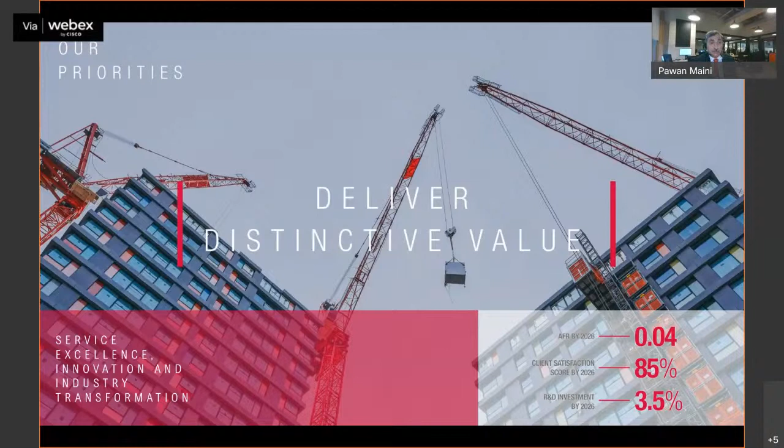And the last one is really showcasing again - the graphic over there actually has our Mace Tech Solutions, which is about how we build automated buildings. So we want to reduce our accident frequency rate. We want to develop a client satisfaction score, and then more than the profit that we make, we want to invest in R&D, because that's how we believe we will be able to provide value to the society, and in turn create value for our clients, for our staff, and ourselves.

So just a bit further about us, 4 goals for us: safety first, client focus, creating opportunity for our staff, and integrity. We operate across the value chain for built infrastructure, but it's primarily vertical infrastructure. Anything related to horizontal infrastructure, we do play a smaller part in it, but our focus, as you can see over here also, is on the built infrastructure.

Something that makes us a bit apart from others is we operate across the entire life cycle of projects. So we are a small developer in our own right. We are a project management firm, a program management firm - that's the part that I work on most. We are also a contractor, primarily in the UK, a significant contractor - you're talking about 15,000 crore rupees of construction work on our own books. And finally, we are a facility management operator.

We pretty much spread all across the globe, a little over 6,000 staff. India, we are about 5% of that, so about 300 staff. Overall revenue, again, in the range of about 18,000 to 20,000 crores on an annual basis. And that just gives you a smattering of where our projects are located. And the last one about ourselves over here, before we jump into the modern methods, gives you an idea of the clientele that we have in India.

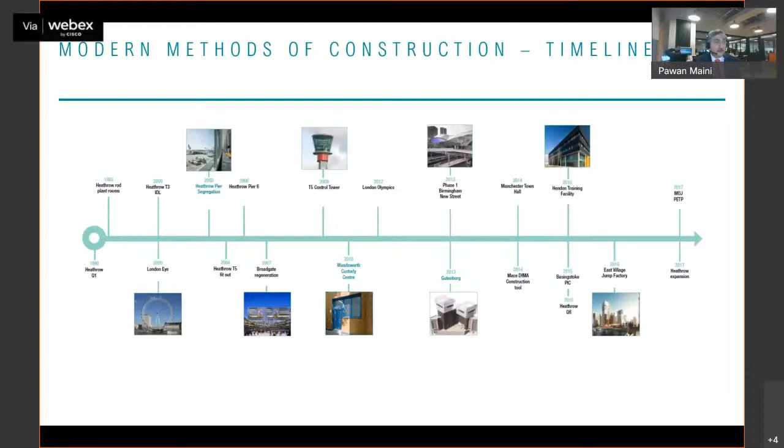What you see here is the East Village Jump Factory, taking you to 2016. You will see videos on that where there are these 28 and 30-story buildings, which we were able to construct in a very rapid manner.

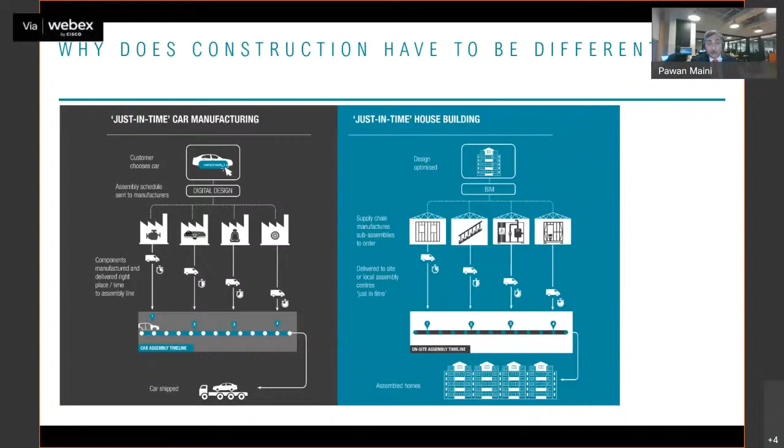So, of course, doing modern construction or modern manufacturing, there are a lot of parallels there. Now, we've got to thank people like Henry Ford for introducing just-in-time car manufacturing, right? We know how the Japanese have done the just-in-time, the Kanban systems they introduced, where each element is made and the whole car or any other vehicle is constructed. Why is it that we cannot do that in construction? It was mentioned right in the beginning that we still typically go by the age-old systems we have been using — nothing wrong against them, but can they be made more efficient? Can they be made more sustainable? That's what we need to look at, and that's what our approach has been.

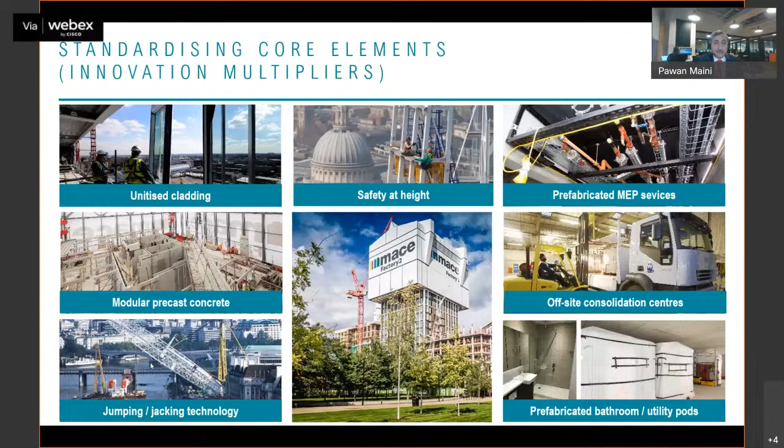We actually became the de facto contractor, pulled in a lot of stakeholders, constructed the full London Eye ring on the river, pieced it together on the Thames, and then just jacked it into place in two movements. And prefabricated bathroom utility pods, that's fairly common.

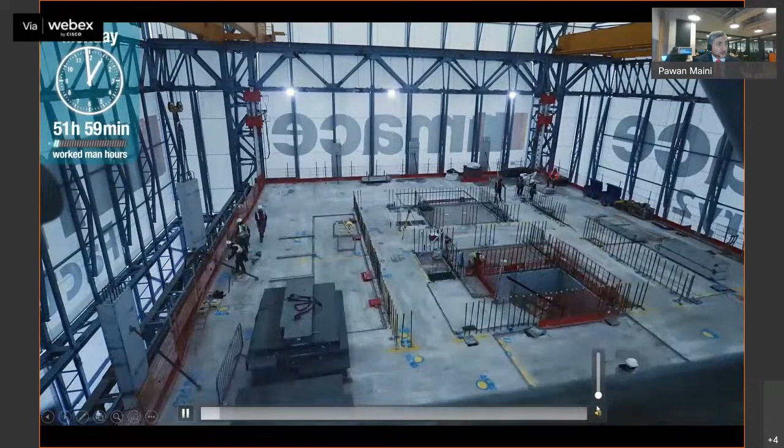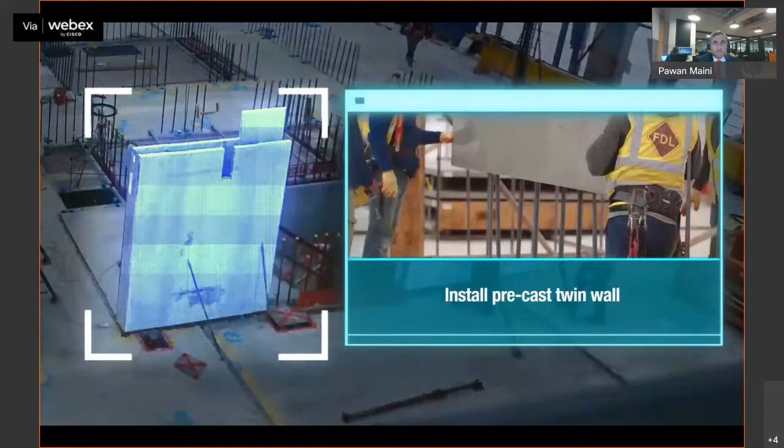But basically what you're seeing, let me just stop it for a second and take it a bit back. But basically what you're going to see is one floor being completed on this building.

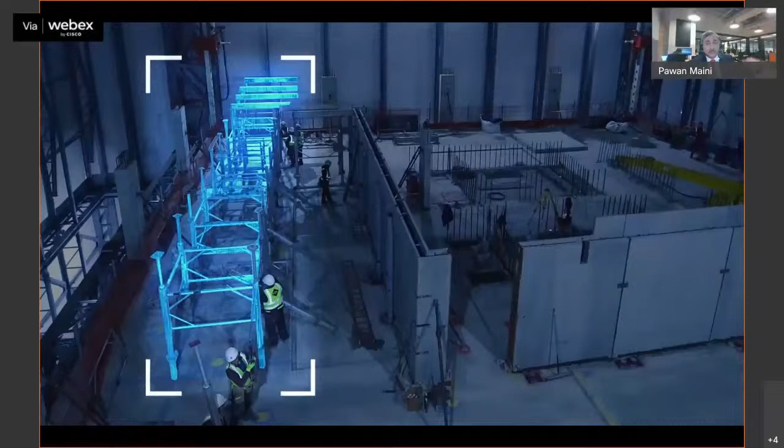This is a 28-story tower. There were two towers, a 28 and a 30-story tower, about 7,000 square feet floor plate. So nothing incredibly huge. The way we constructed it, and we'll get to that at the end, was trying to complete each floor in one week. So that's what you will see.

And that's what you see, the building on the right over there. So let me just turn this video on now.

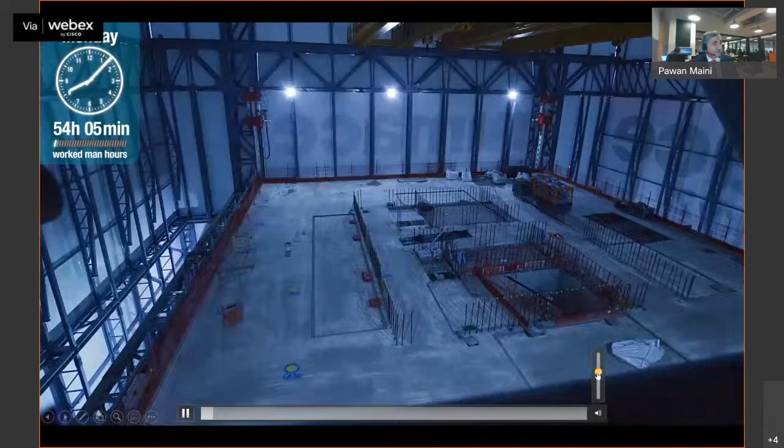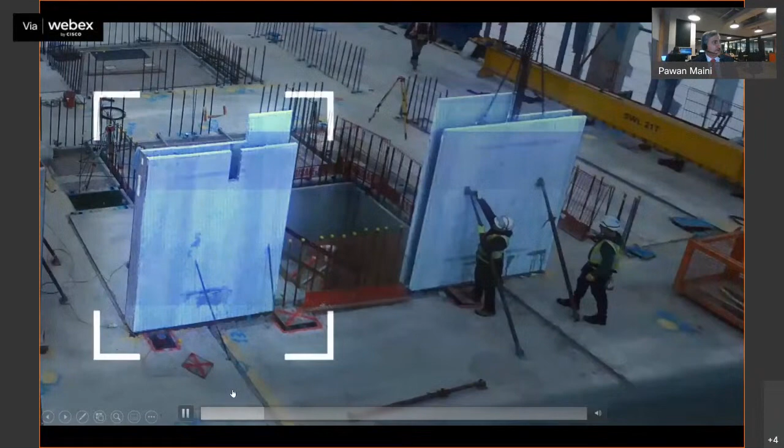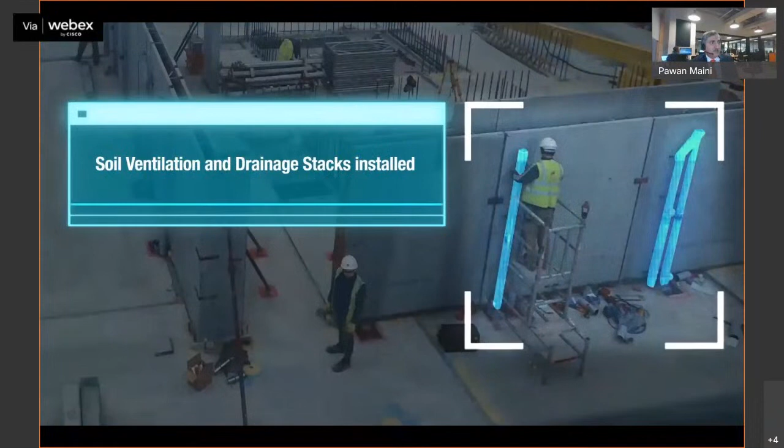So what you see over there is the precast elements being brought in, these double walled units being installed. You've got the propping for the next floor being installed. Your MEP plumbing stacks being put in, your pods being put in for the bathroom, cupboards.

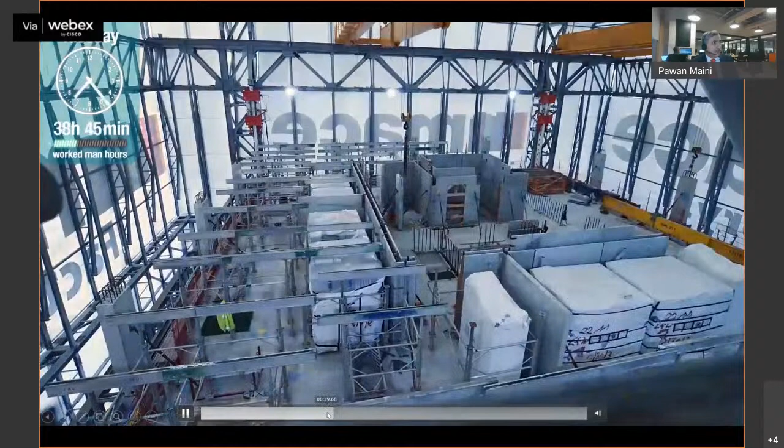One of the things you will notice over here is this is actually all being done by gantry cranes. We did not have any tower cranes on this. And what we did really was create a factory-like environment by having a 6-floor truss, which would jump up floor by floor. And by providing this covering, we were able to maintain and protect ourselves against the weather, which particularly in London can get pretty bad, cold, windy, snowing, all of those elements, providing a kind of factory-like environment within the building construction area.

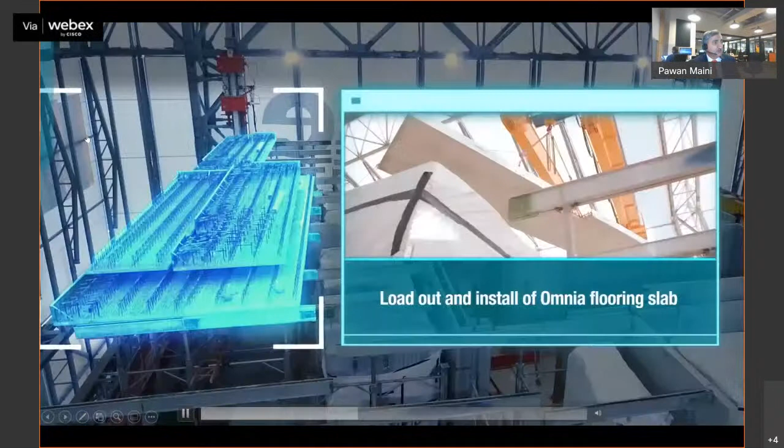So you've got all the beam elements coming in. You can see that's the amount of time that's been worked over there. Installing slabs, Omnia slabs, it's half concrete already and the lattice work is sticking out. Putting in precast stairs and half landings.

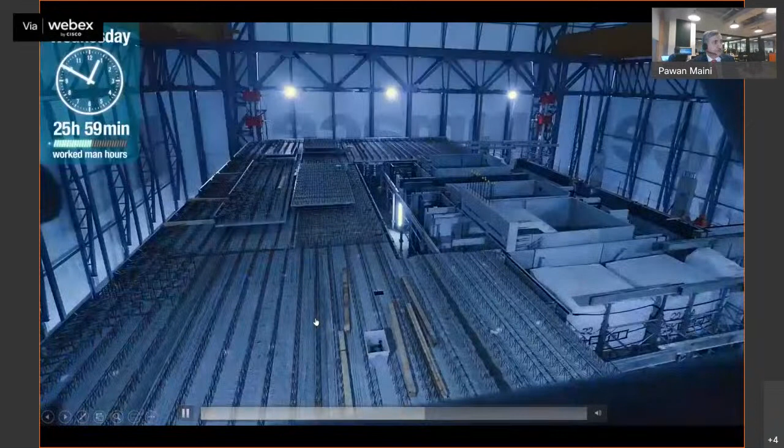In this particular case, putting in the horizontal MEP modules, getting all the rebar in for the flooring to stitch that up.

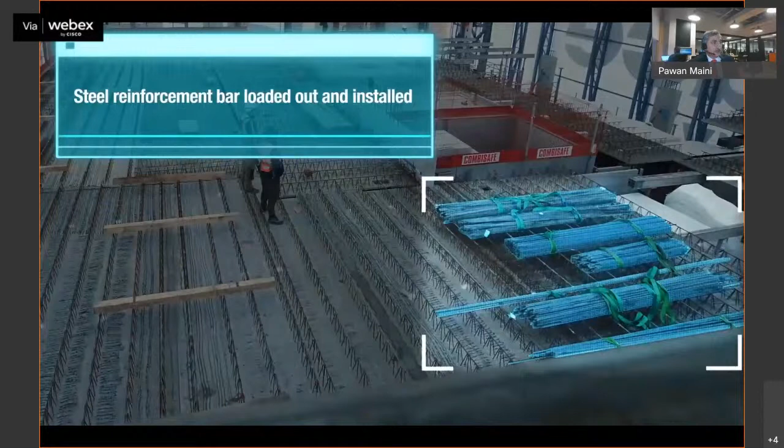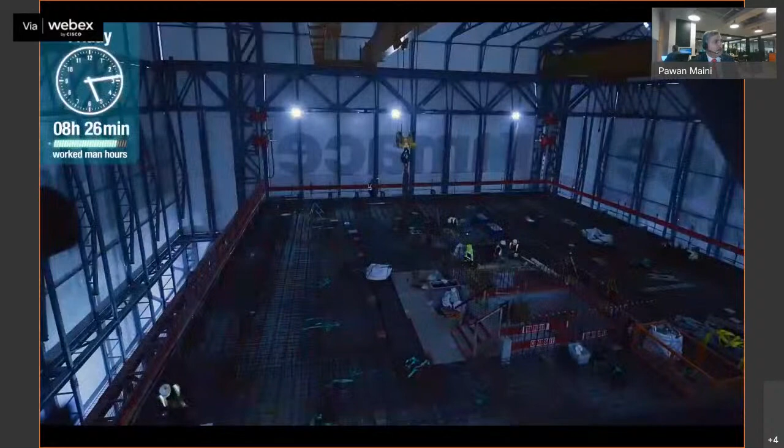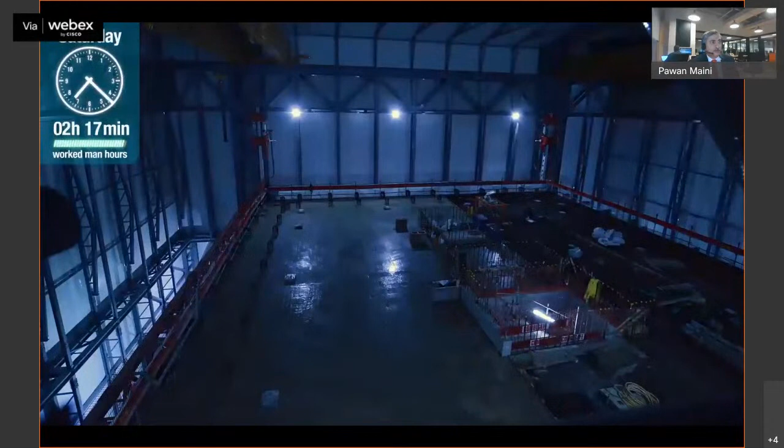Once the whole thing is completed, we jack it up. So we started from 55 hours, we're down to about 40 hours worth of work being done on the floor. And so getting all the rebar, we're ready for the reinforcement now, pour. About 4 hours of pour, and the floor is done.

So what were we able to achieve with this? Well, firstly, it was our safest delivery. We were able to make sure we were operating in a very planned, organized manner, with 2.2 million hours of safe work.

We were able to get 2 times the cycle time improvement. There were fewer deliveries because fully constructed elements were being brought to site, and a significant reduction in manual work.

Effectively, while it took us a bit longer to start the works, we were able to complete the full building in 44 weeks. So 28 floors in roughly about 9 months time is what we were able to achieve, from the start of excavation of that building to handing the keys over.

And really, where we saved a lot of time was typically on this kind of building, you would have the civil construction works happening, and there is a lag between that and the amount of time it takes for the MEP and all the finishing works, which we were able to do much more rapidly, one after the other.

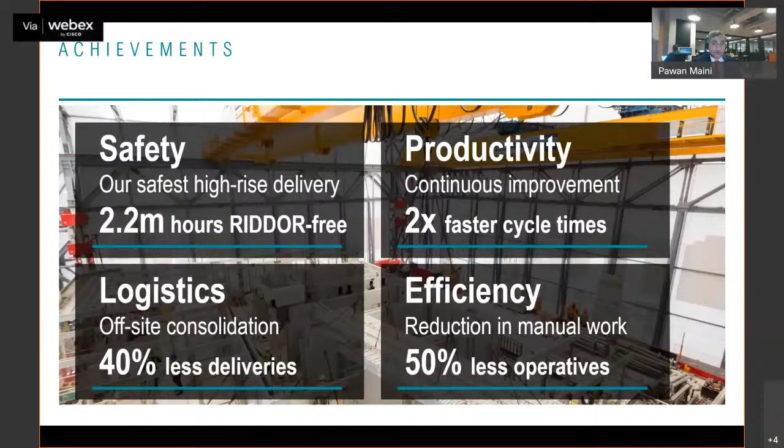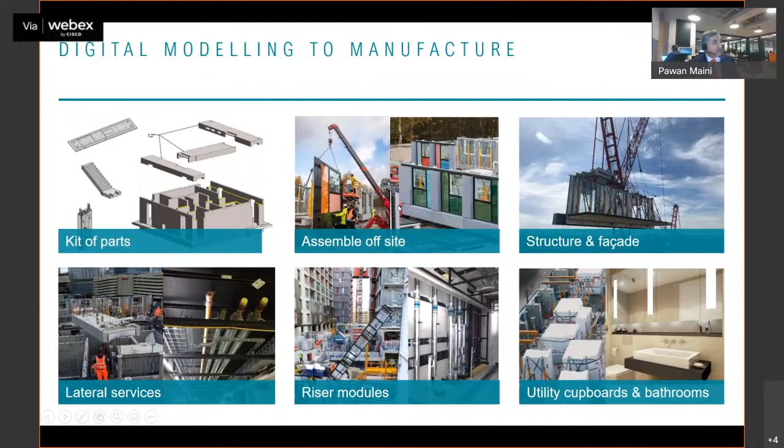This shows the different elements we've already seen. We've talked about how we would put these things together, and we've now moved on to the next level. What you see here is a constructed element with flooring already installed, and the side wall already installed. The yellow parts you see are actually the prop for the next floor. This is what we're calling our Mace Tech solutions.

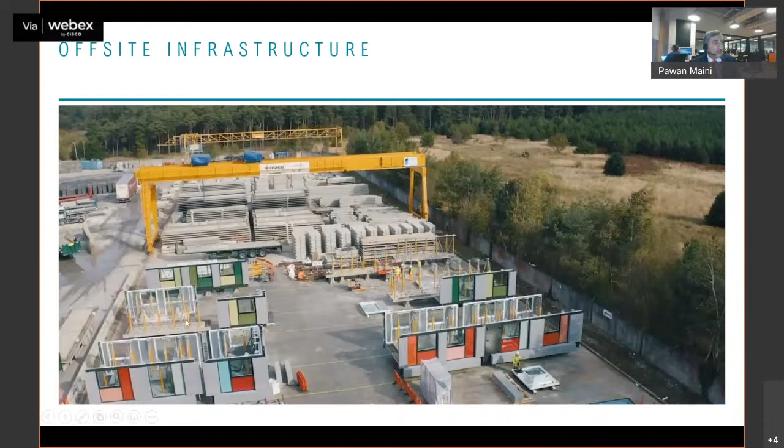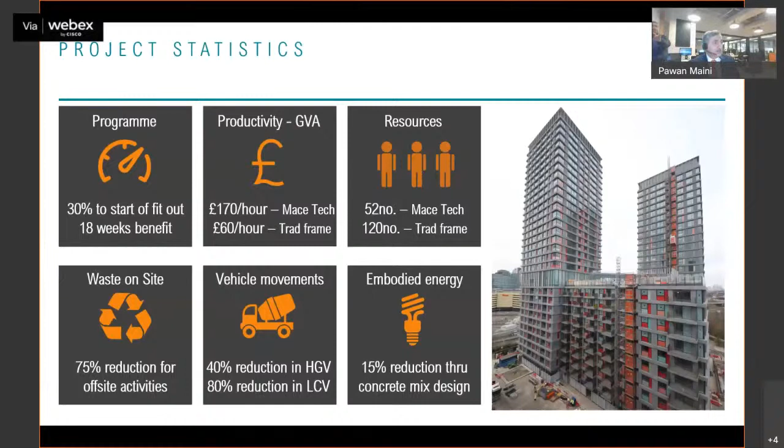This is what we've applied on a further project after that. It shows the productivity we've been able to get — almost 3 times what we have on other projects. We were able to reduce the number of vehicles coming in, reduce the embodied energy — that's the sustainable element — and reduce the waste on site. I'll show you this.

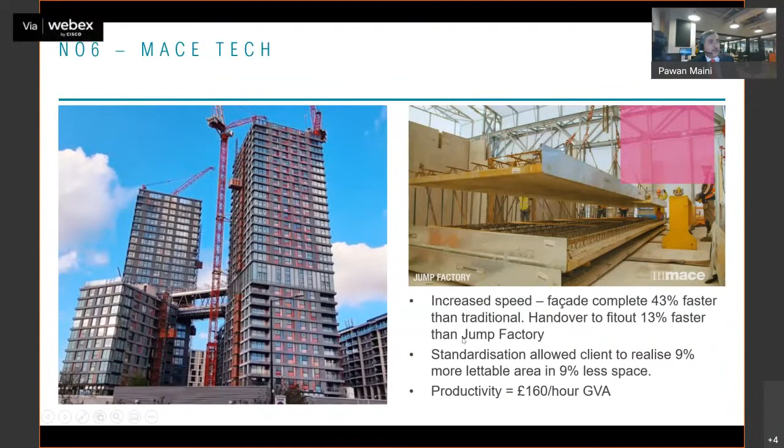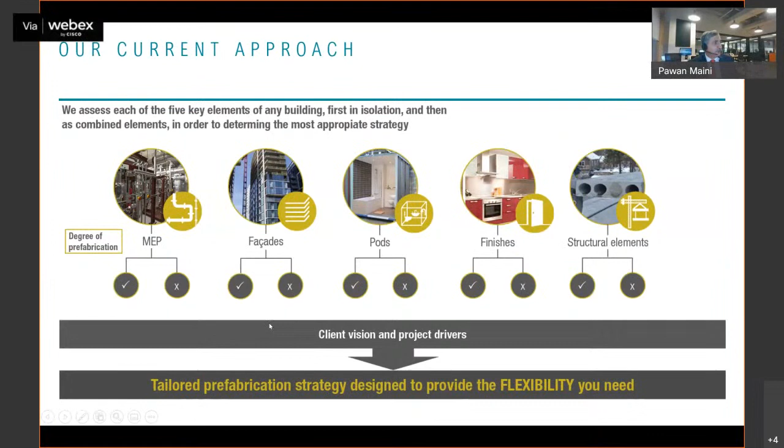That's again showing the Mace Factory approach, and that's a different element. So what we've done is present different elements, whether it's MEP, facades, pods, finishes, or structural elements. Right now about 40% of our work is being done off-site and about 60% on-site. What we want to achieve is 80-85% off-site, with much less on-site.

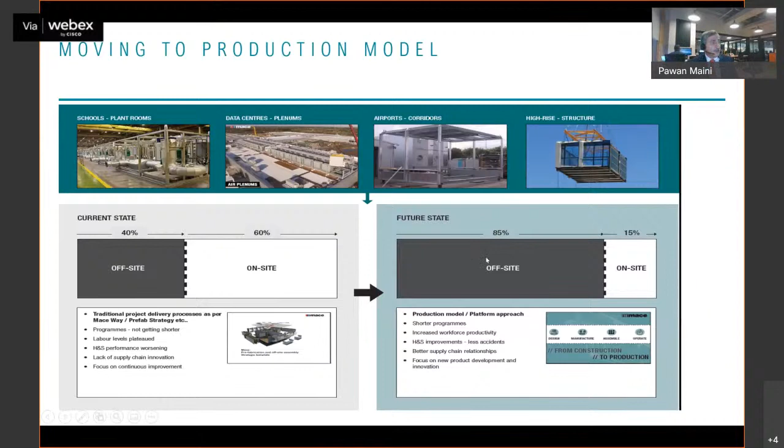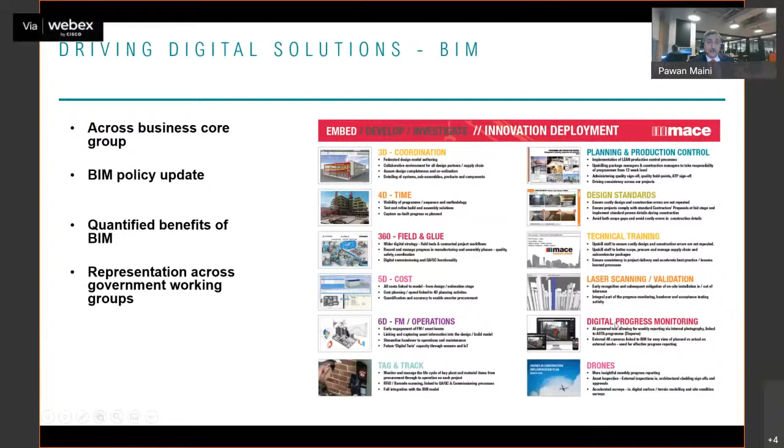How are we doing this? Everybody is familiar with BIM. How do you take that from a 3D perspective and add time, add cost, add operations? When we start working on a project, we first look at what the end use is going to be. We get the operator involved during the design stage so that when we're handing over, we already know exactly how things are going to work. These are all simple things we know — but how do you take it to the last level of detailing?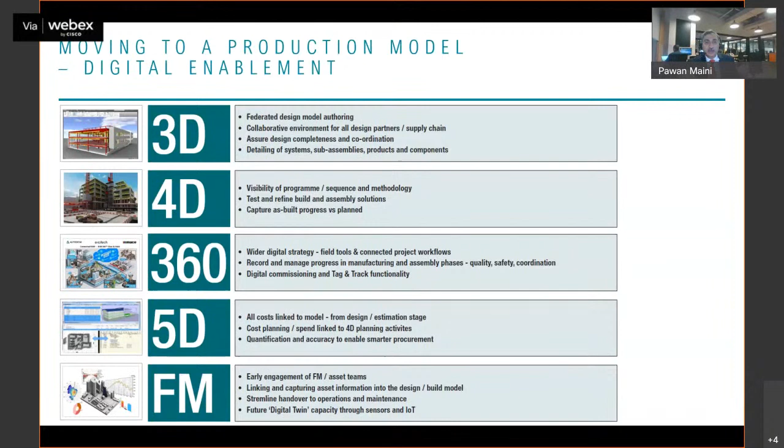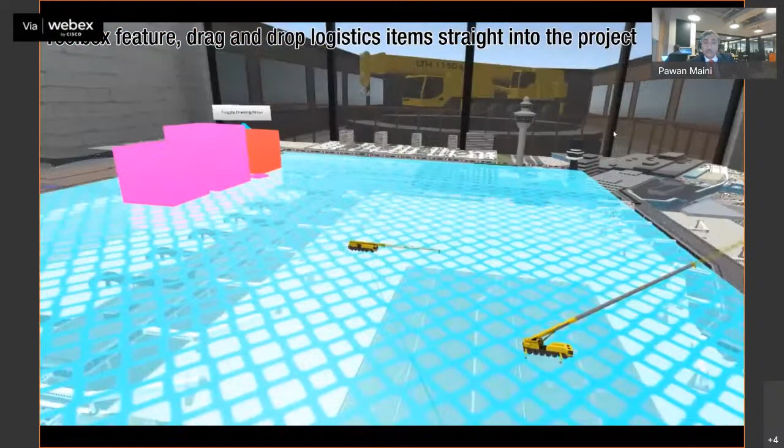These are the kind of things we do when planning a project. We use building digital twins of projects, seeing exactly what kind of equipment we'll be using, placing it on what we believe is the construction site. We know exactly what the reach is, and we test all these systems out before we actually go on site and start doing the works.

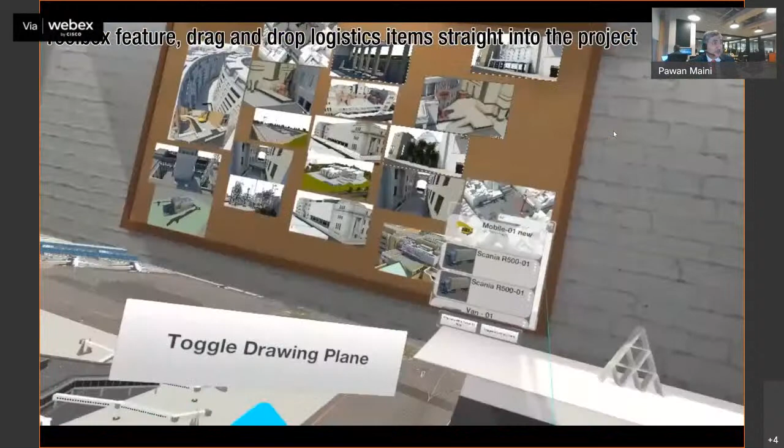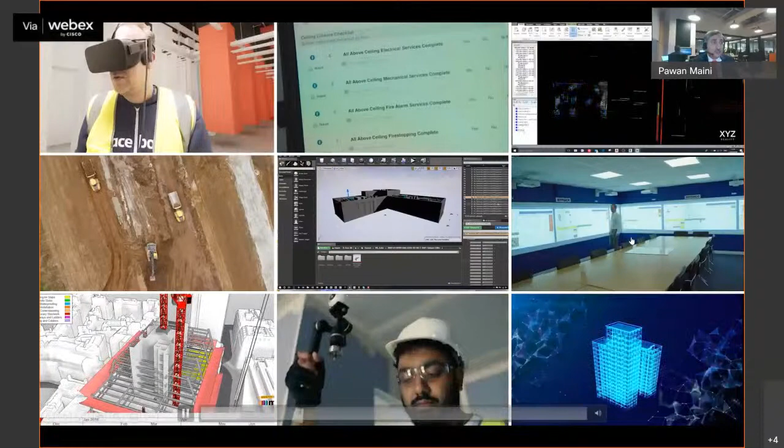Using different technologies — a lot of what you see on the right side is a digital war room. We can look at the schedule, the costs, quality reports, safety reports — all available, thankfully, just on a tablet.

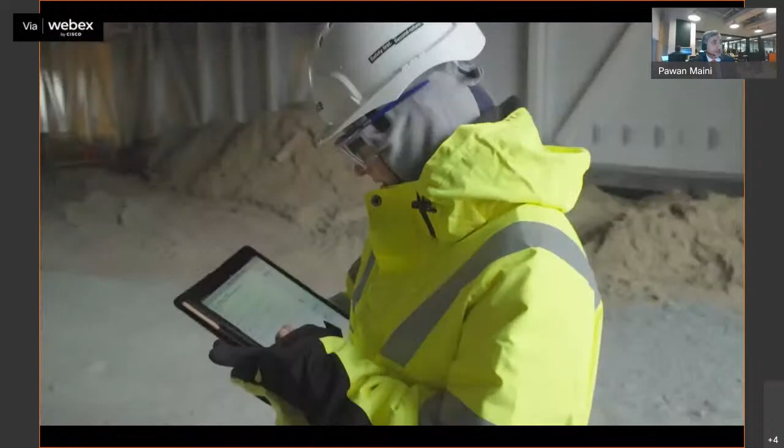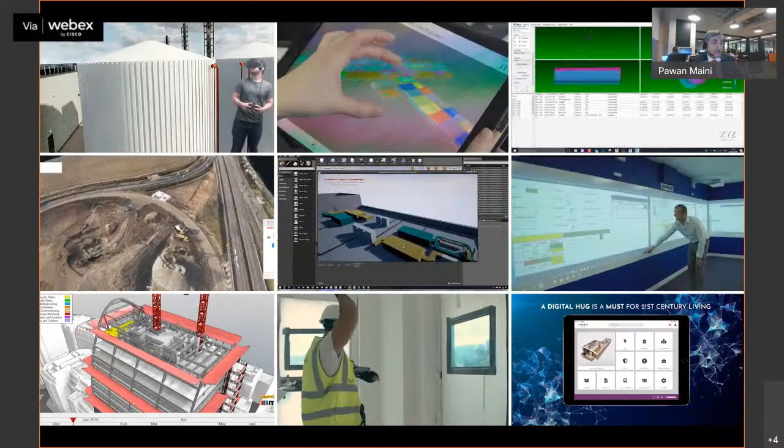What you see is a very large data center we've constructed. We're doing roughly 3,000 to 4,000 crores worth of data center construction using virtual reality — doing all these elements upfront, discussing the schedule and cost in detail, doing laser scanning, moving things around very quickly, and understanding the impact of those elements going forward.

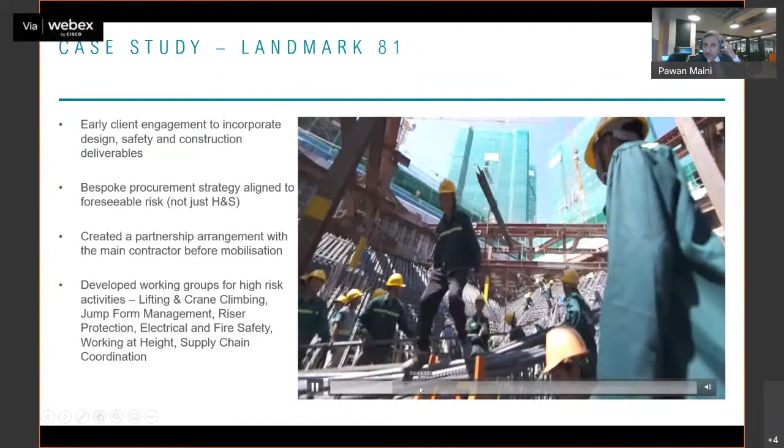I'll show only a bit of this video just to give you an idea. It's not just in India that we're doing something like this, but also in Vietnam. This is a 450-meter tall tower — 450 meters, that's a tall one.

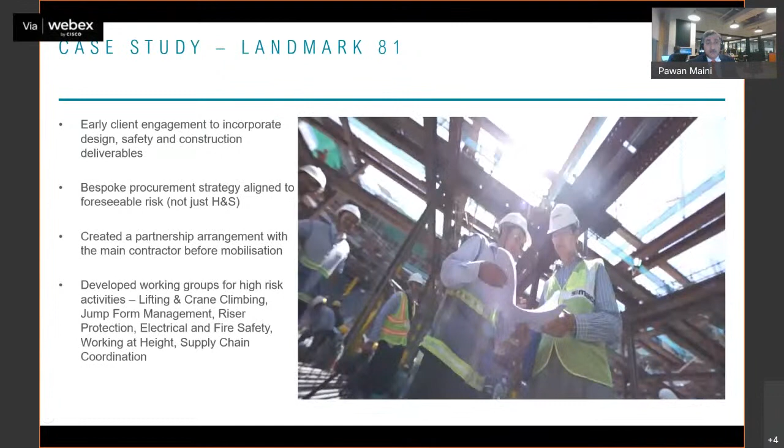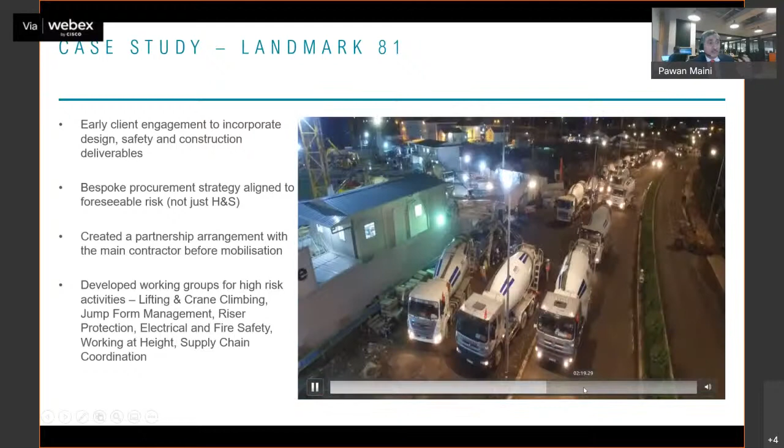Right, and we have been the project managers. We were involved on this project right from the start, looking at how this can be constructed in a safe manner. So that's what we did on that particular project.

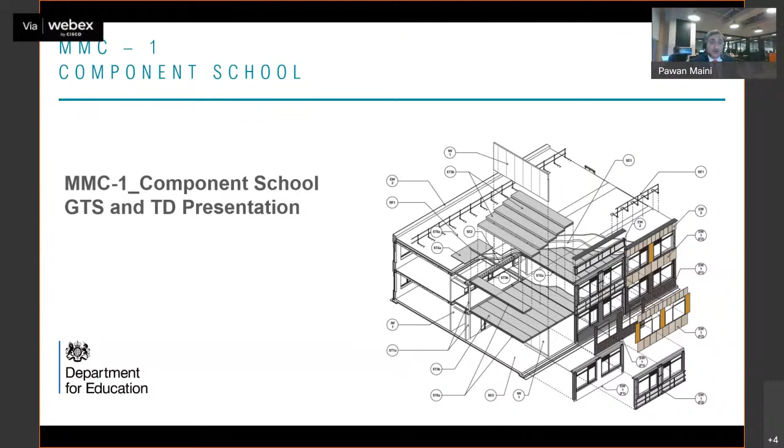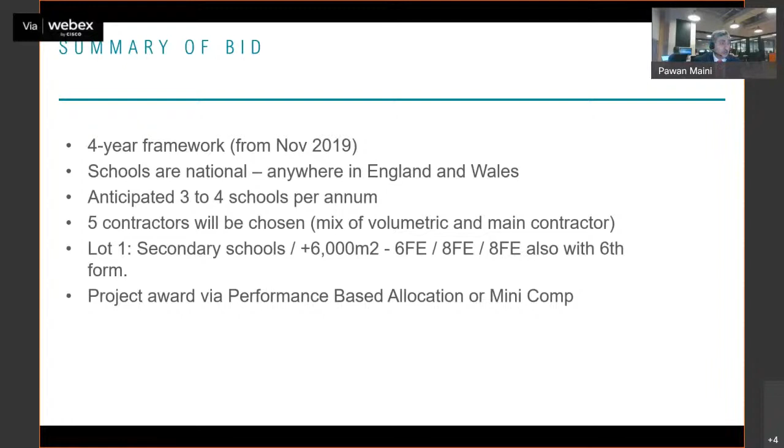This is just to give you a flavor of the level of detail we would go into. We have actually come up with this kit of parts for a school. What we've done is really taken down the design time for a school from 300 hours to just 40 hours. In 40 hours, we can design our entire school using different kits of parts and typologies, depending upon how the school needs to be constructed. There are different elements that are defined.

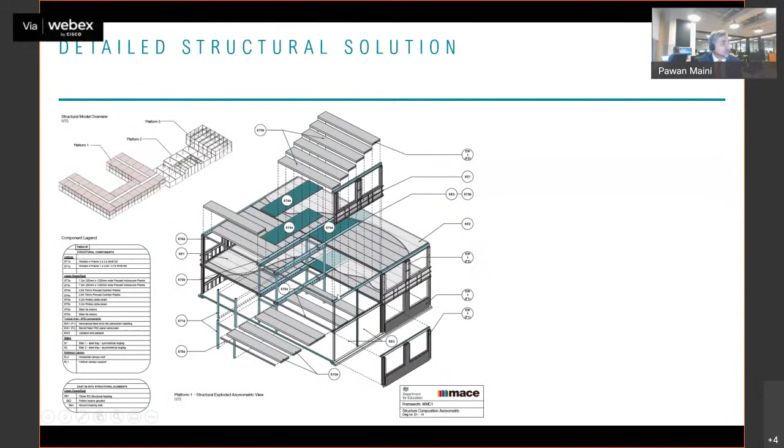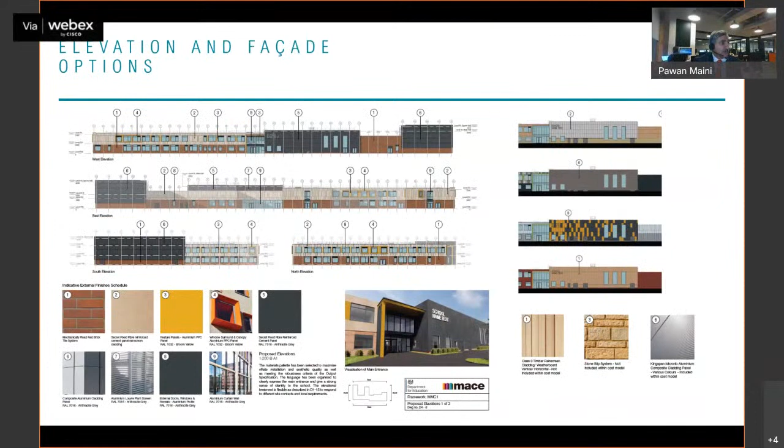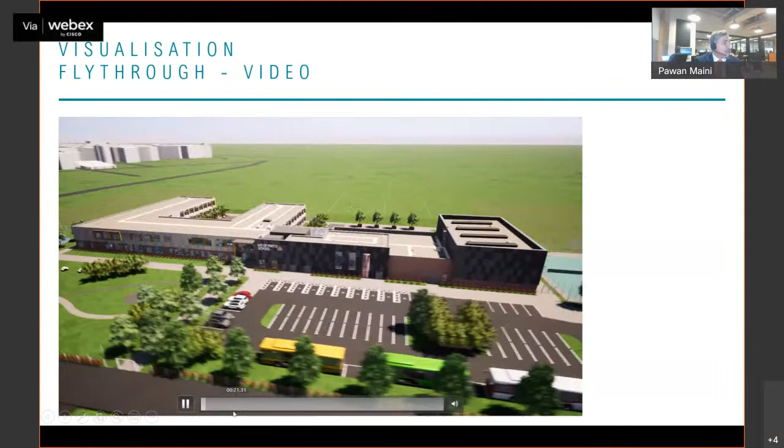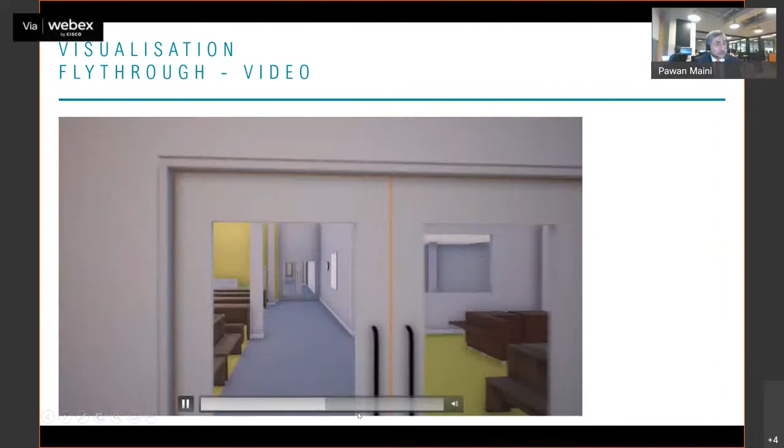Each of those elements is then broken down, and these are just different examples of that. What you get at the end of the day from all of this is actually a school, one where you're able to look at exactly what elements are there. You can do a fly-through of that, because each of these elements, down to individual door handles, hinges, desks, everything, are common across all schools. Those are all defined, and we're able to construct that entire element in a digital format.

So this is where we are at finally. We've got the system process map. We've identified platforms, costs, and volume. We're looking at how to procure each of these elements better. And then finally, we've got the building constructed - how do we turn it over to operations?

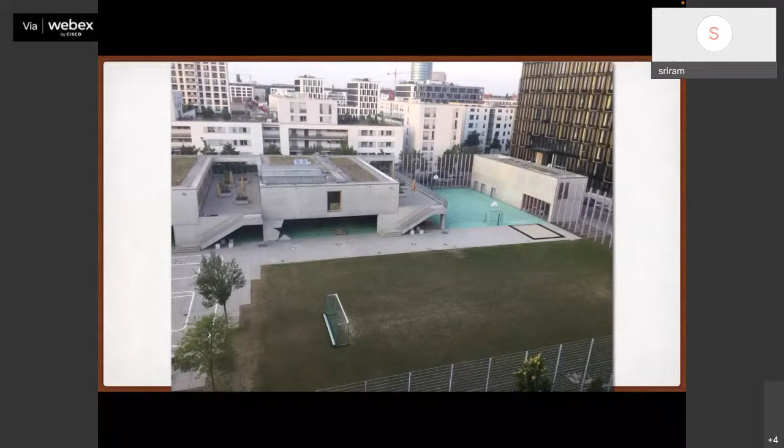So this was the school which I was talking to you all about. It was just right behind our hotel, and as we opened the window, we saw the school, all built in exposed concrete surfaces, so beautifully done, so neatly done.

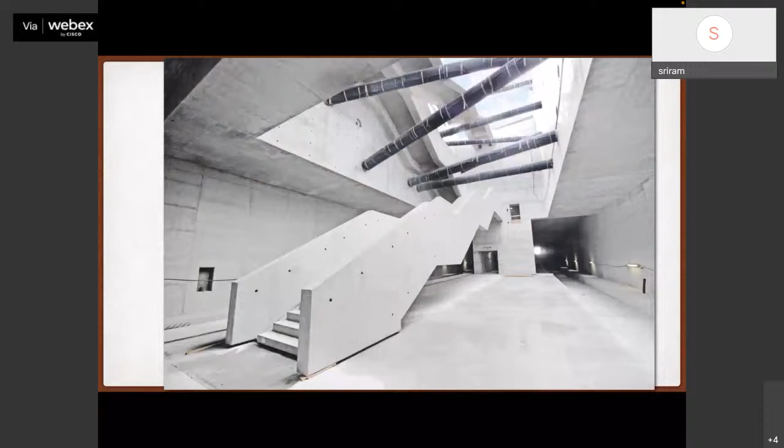We went again to the BMW center, and there again we saw such beautiful exposed concrete finishes everywhere. This is something unbelievable. You don't see even any attempt at them trying to do anything on that, and these are some of the buildings which we also came across very close to our hotel in Berlin.

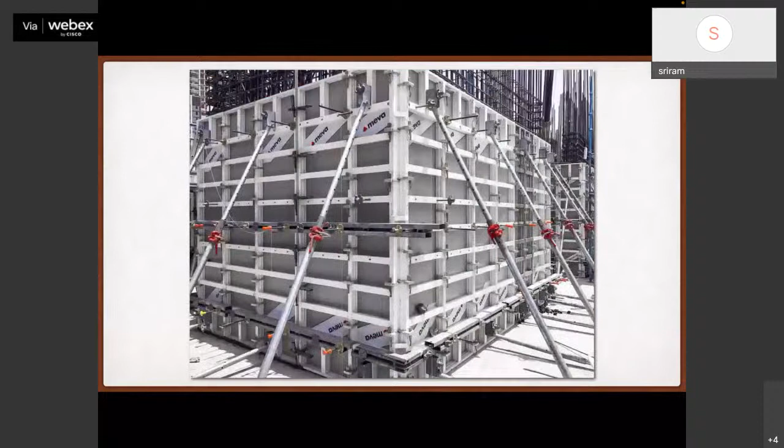So if we just look at these beautiful surfaces which have been achieved, we really came across the whole aspect to find out that what they actually use is basically the best quality of formwork, and their formwork is modular. It is very, very different from the sort of formwork we use, and whatever we have been taught, vis-a-vis aluminum formwork or whatever traditional formwork was.

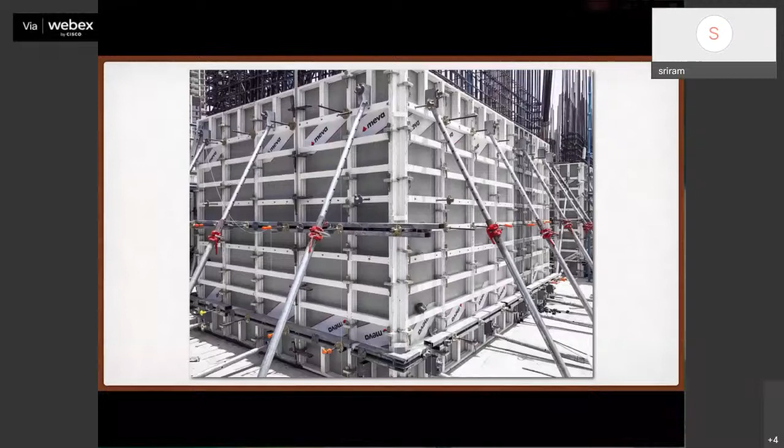So now I will just show you a small video. This is a system called MEVA, which is the same technology which was used. Is the video playing on the screen? Yes.

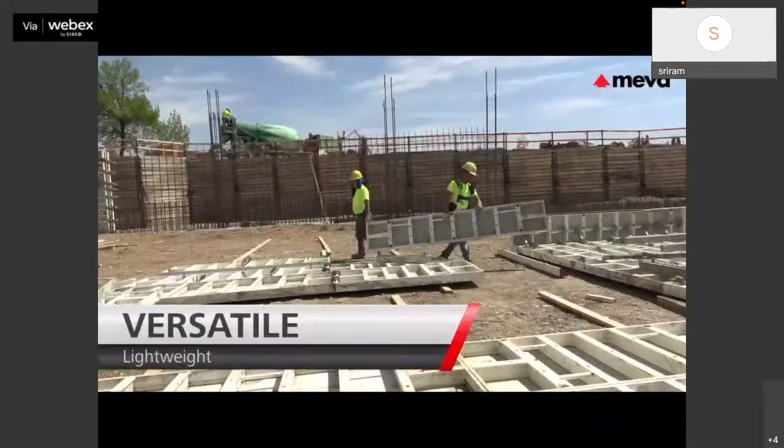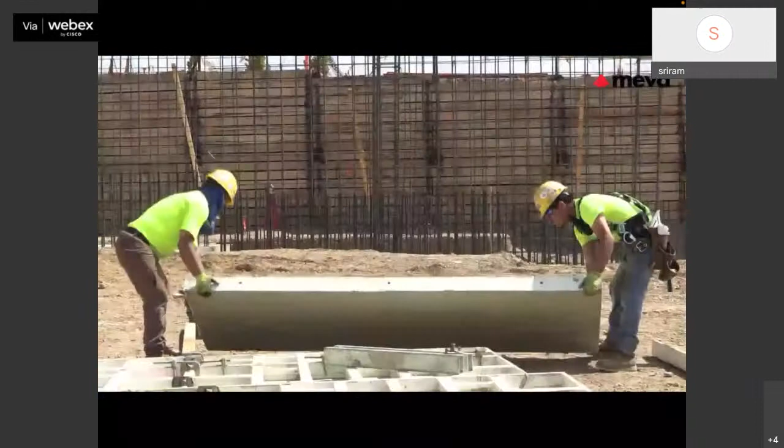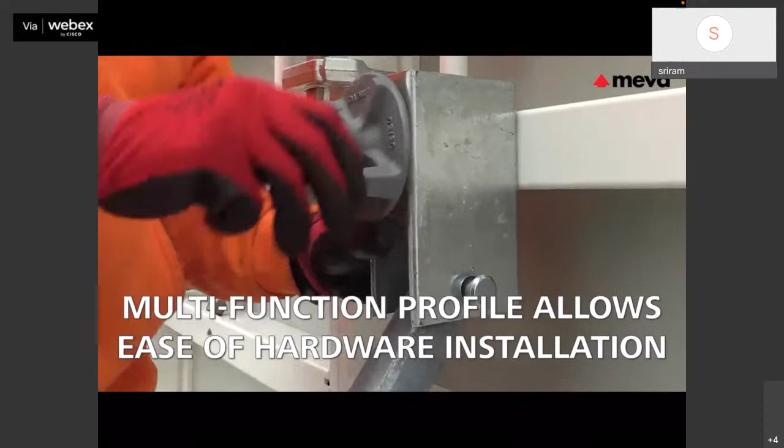This is a formwork system which can either be assembled by hand, or it can be ganged up. A very, very simple system which takes just about 5% of the operations of what aluminum formwork takes. A 3-meter height panel has just got 3 tie rods and three clips like this. And this is one of the most beautiful systems called Alkus, which is good for 1,000 uses.

Every panel can be handled by hand. It doesn't require a crane generally. And most importantly, this formwork is good for 1,000 uses.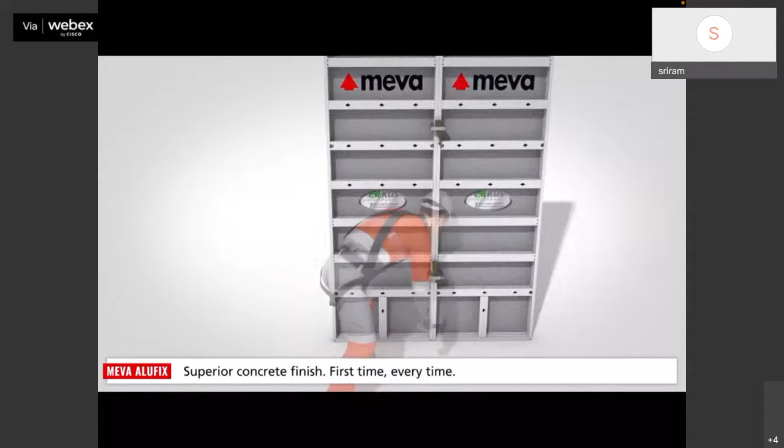This is one of the most innovative facing materials you've got, called alkus, which has a 7-year warranty on it, and it's a fantastic material which gives you very, very good shutter finish concrete. This is used instead of plywood or a metal fascia. As you can see, the entire height of the formwork has just got 3 clamps. That's all, 3 formwork clamps. Very simple to drive in.

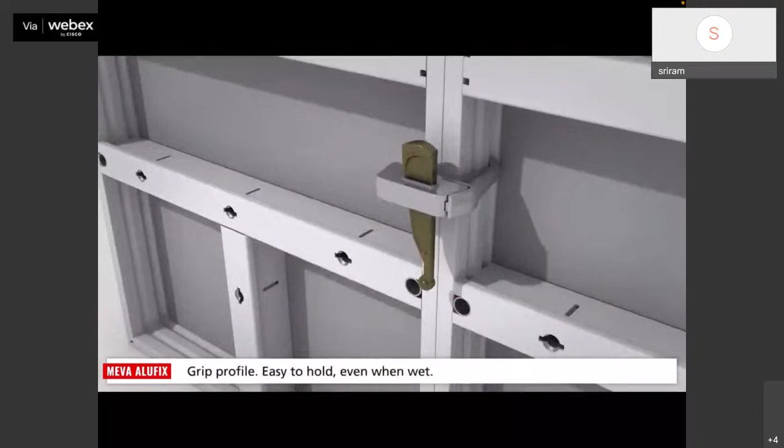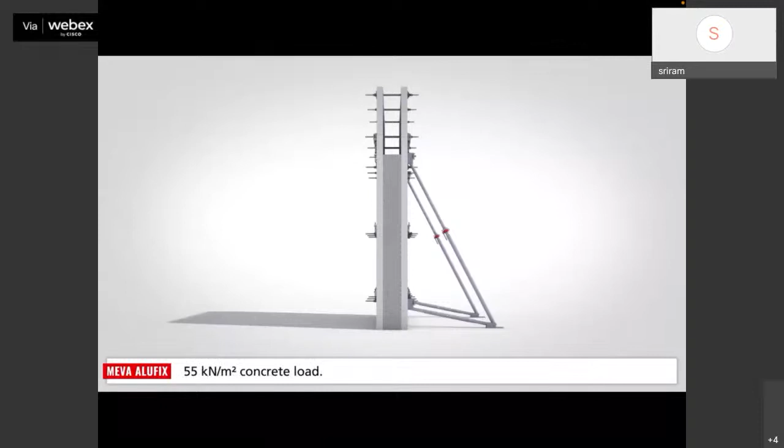My dear friends, generally one floor of aluminum formwork has got 5,000 to 6,000 operations, whereas this will have a maximum of about 150 operations. You just get three sets of tie rods in the entire height of the structure, and 3 clamps. Extremely easy to de-shutter.

So what is the big difference between the sort of formwork we use otherwise and what we are trying to talk about now is this is modular. All your openings, you just have blockouts, or you've got negative areas within the formwork, which you can do with either plywood or anything like that. So all that it does is very, very simple. I can just show it to you.

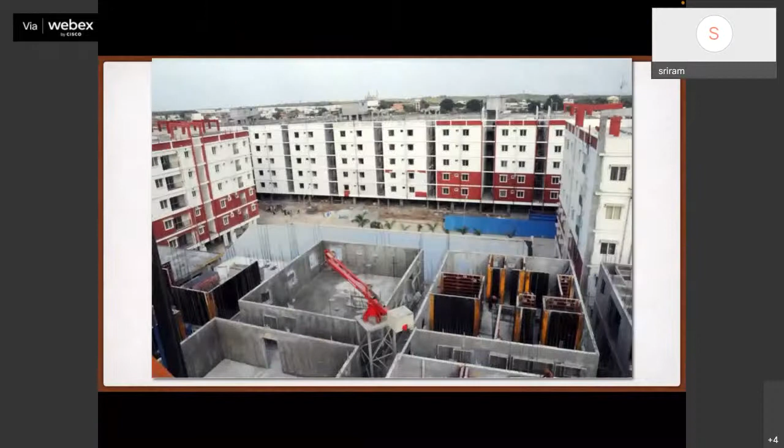This is one project where they used the same technology, very similar technology, in Hyderabad, where you can see the outer walls are cast in one go. Very, very minimal deployment of formwork in this whole aspect, because the outer walls are cast separately. As you can see on the right side of the photograph, they're casting the internal walls as a secondary action, and then they pour the roof for the whole thing together. So what happens is, on a very small threshold costing, you can start using the best of technology, because all these openings you see are actually just negative areas which are there in the formwork itself.

So there are no openings as such, so it's very, very easy to use this on multiple projects. You buy one set of this formwork, you can use it on multiple projects. You can do multiple walls at a time.

So you can break this whole thing down into, for example, many of them are talking about a floor every month, a floor every day, a floor every 3 days, etc. But a good part of our market doesn't require that speed. We want the economy, we want it to be more sustainable, because definitely anything you do quicker, anything you do with less of other operations.

One thing which I've asked quite a few of the construction engineers across the country is, if there's one thing which you're not under control, it is plastering. The next thing which you're not under control is your masonry. These two things are very, very difficult for you to control on a site. These are things which we need to mechanize, and we need to get out of the situations where we are today. We need to be having concrete and seeing to it things can go much faster.

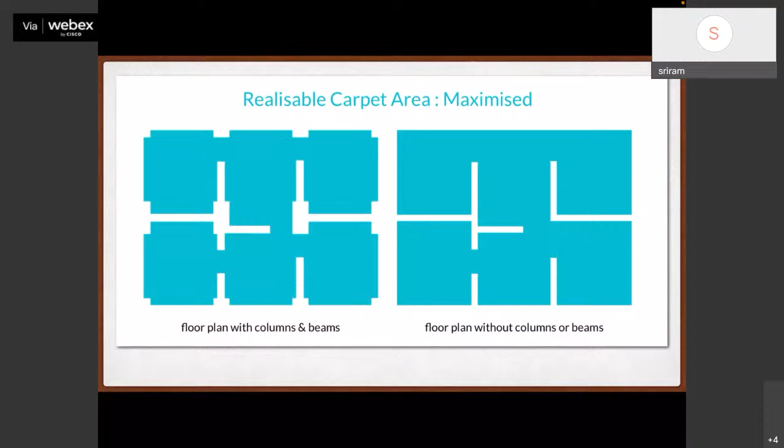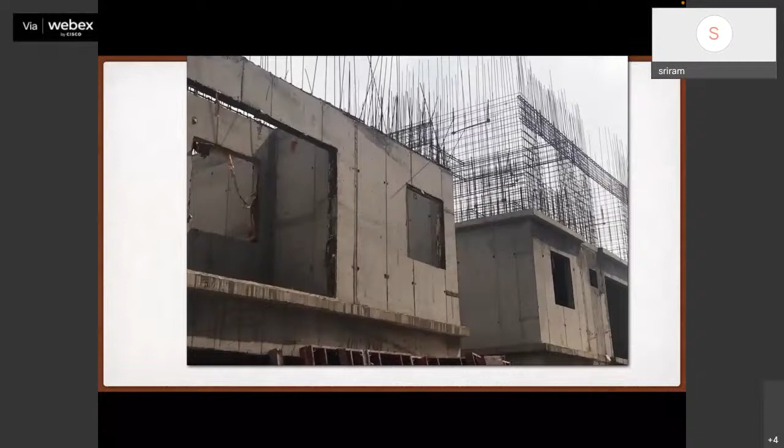This is the building that you can see fully completed. In a typical sense, you would be spending crores of rupees on formwork and completing such a building maybe in about 3 to 4 months. But with very small costing, very, very small, maybe about 30 lakhs or 40 lakhs of investment, you're maybe completing this building in about 9 months.

So this is what we want. 9 months is fine for us, but we want to be using technology, we want to be getting good quality, and we don't want rework. So this is something which is really going to help us a lot on that front.

This is again where you can see we've created a close-up shot. On the top, you can see that the rebar is placed and the formwork is being placed. All that they're going to do is to have blockouts. As you can see, there's a blockout here which is in place still for the ventilator. So you have blockouts and you just pour the concrete.

But now for a place like this, you can see very, very minimal use of formwork. But excellent finishes which they're achieving, with minimum deployment of formwork on this whole thing.

So here, when we worked with MEVA for one of our projects on how we can optimize the entire formwork, here you can see the entire floor plan. This has got 10 apartments in a floor, 5 on each side.

On the top, what you see, the 5 is exactly a mirror image of the bottom. So all that we wanted to do was deploy very minimum formwork, but we wanted to achieve 1 floor every 15 days. So how do we do this?

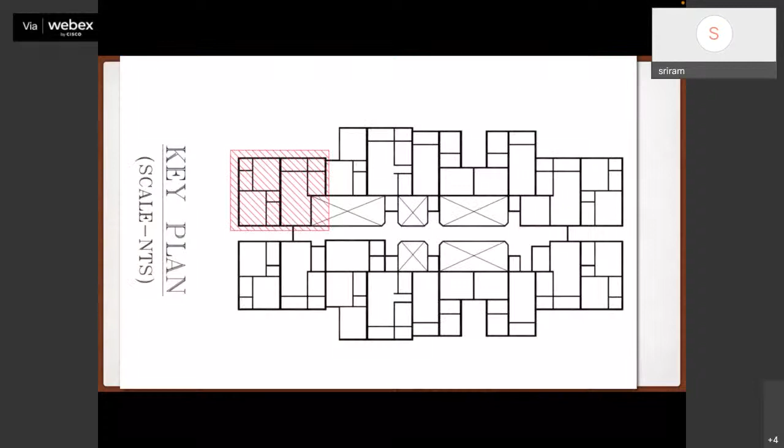This is the only shaded part of what we had. We went for formwork like this. Again, standard panels - we did not go for any panels of different sizes, custom made for us. 95% of this is standard panels, 5% is filler panels here and there.

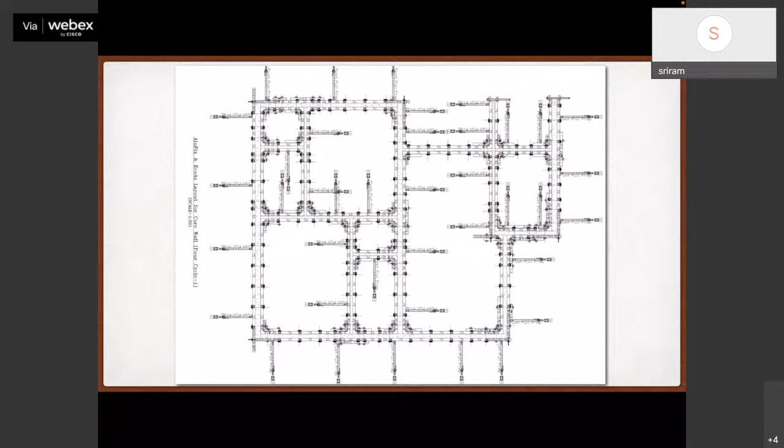So using the same formwork, as you can see on the left side, it says cycle 1. Then we wanted to go to the next 2 apartments for cycle 2. Using the same formwork, we could do cycle 2 without any additions. And all that we required for cycle 3 was this additional piece of formwork which we had to take.

So what happened was, with a very minimum deployment of formwork, you could be achieving something which is world class and something which can go much faster than your traditional construction. Most importantly, because they're all shear walls monolithically cast together, your issues of rework, problems like cracks, etc., from regular masonry and plaster will definitely not come in here.

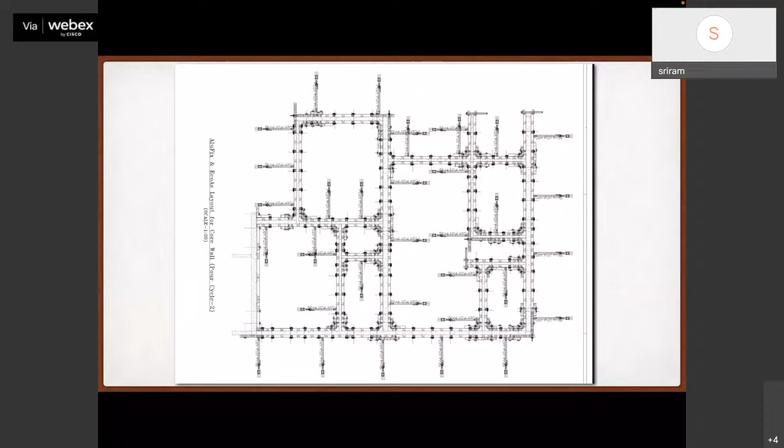So once you're done with casting each apartment separately, you cast the whole roof in one go. This is what you can see here. All the solid areas are the walls which are going to be cast in concrete, and the rest of it is just filler.

You can do it with your regular plywood or whatever roof centering material you already have, because you don't have to invest in something new - all of us already have a lot of roof centering material available, and this can just go in so that the roof is totally monolithic. There's no joint anywhere in the roof. You don't have any problem with leakages, etc.

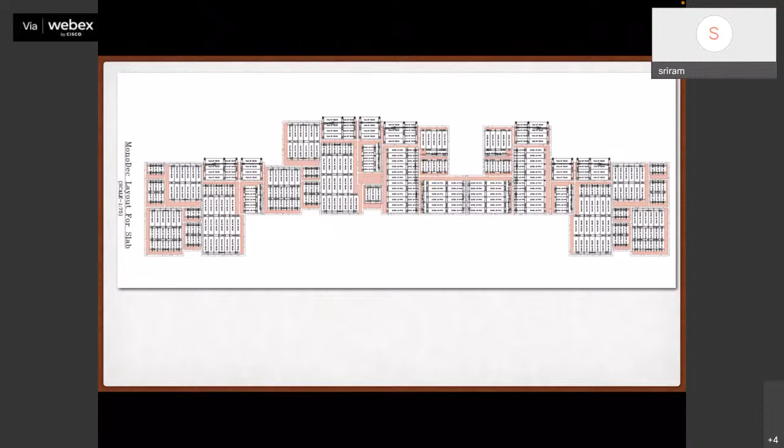So this is where we're trying to marry these two things, and how we can come out of this from where we are. So this, my dear friends, is one of my humble efforts at putting through a presentation which I feel all of us can do. It is something which all of us can surely do.

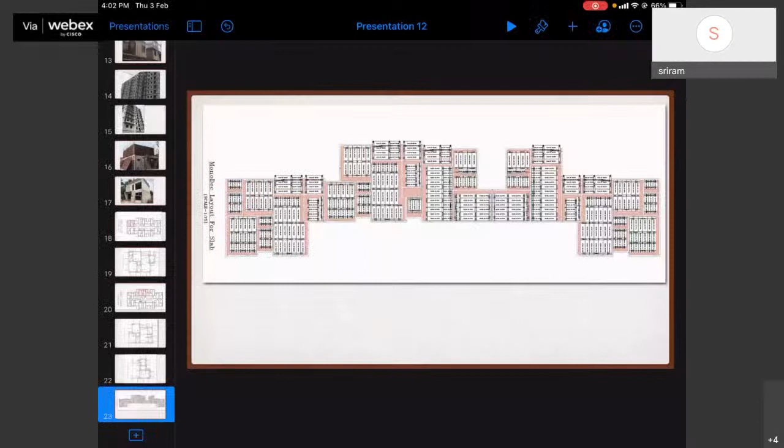So this was a humble attempt to try and find out how we can come out with something which all of us can actually go ahead and implement tomorrow. It's something which is very much required, because whenever we embrace any technology like this, we are doing our bit for sustainability - our traditional methods of construction create a lot of noise, dust, and chaos all over the place. So how are we going to minimize all these things? Most important is time, because the longer you're on a site, you're polluting the place and causing more disruption to the entire environment.

So this, my dear friends, was my humble attempt at something which is very expressly doable. Thank you, you've been a wonderful audience. I'm looking forward to taking questions as and when Puneet hands it over to us.